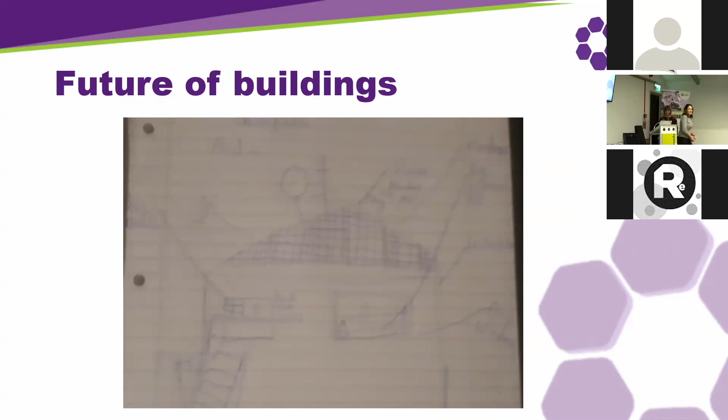So as John said, I'm Joanna Clarke, so I don't need to introduce that. Just a few things I'm going to talk about today: firstly, a little bit about my background, then an introduction to what we mean by active buildings, the political context, why it's important, what we're doing, then the principles, some of our case studies, and what we're doing to try and transform construction.

So I started my career as an architect in a commercial practice. I worked there for 13, 14 years, and during that time I worked on some really exciting, wide-ranging projects, from designing a new horse racing course to a dental practice, and I worked on lots of historic buildings. So really varied jobs that I worked on.

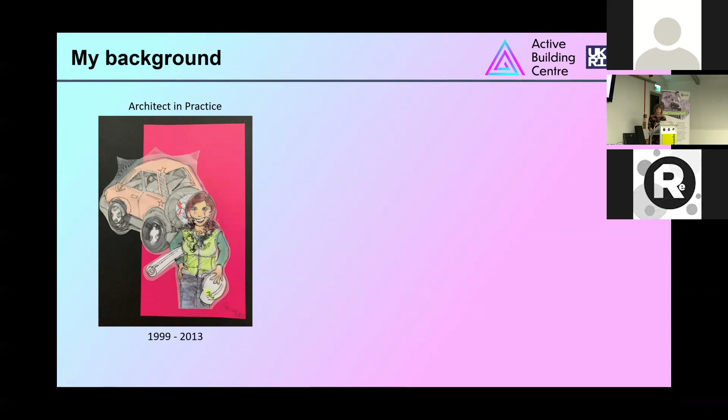But in 2013, I was just looking for a change of direction in my career and stumbled across a role at SPECIFIC, and thought, oh, that sounds interesting, I'll see if I can get a position there. So I started working there in October 2013, and my role at Specific was to liaise with the construction industry and be the conduit between the research and all the exciting new technologies being developed, looking at how those could be translated for use on building projects, and finding suitable buildings to demonstrate them on. As an architect, I thought, well, if we've got all these fantastic technologies, the best way of engaging with architects, contractors and clients is to actually build our own buildings. So we did that, and I'll talk about those a little bit later on.

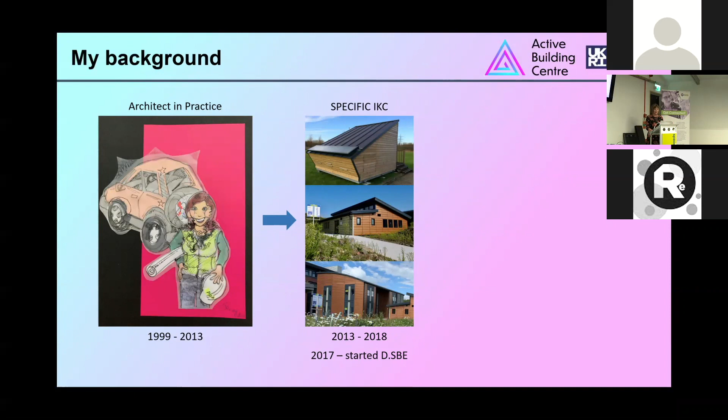Then back in 2017, I started a professional doctorate in the sustainable built environment, mainly to try and create a research project that captured all my architectural knowledge and the knowledge I'd learned on renewable technologies and how to integrate them into buildings, into one sort of research project. That's still ongoing, hopefully finished in the next few years. And then I joined the Active Building Centre back in January 2019, this year.

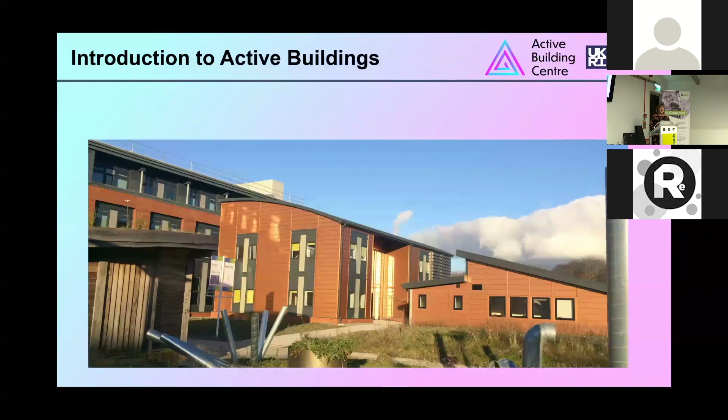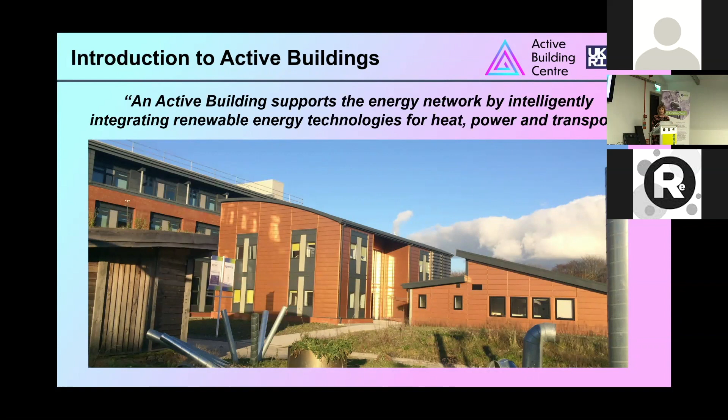But what do we mean by active buildings? An active building is one that uses renewable energy technologies for heat, power and transport, and uses them to intelligently connect the building to the grid. So what we mean by that is that the building supports the energy network rather than being a burden on it, as most buildings are. So we can do things like choose when our power is exported to the grid or taken from the grid. I'll talk a little bit more about that as we go through.

But first of all, I'm just going to set the political context, why it's important that we're doing this work. And on this slide, I'm just going to show some of the targets that the UK and Welsh Government have committed to achieving in the next 30 years. And there's quite a lot of them.

In 2002, the Energy Performance of Buildings Directive set targets to reduce greenhouse gas emissions by 20% below 1990 levels by 2020. The EU 20-20-20 targets added to this with targets for energy efficiency and renewable energy. The UK Renewable Energy Strategy was established to try and reach those targets.

This was followed in 2009 by the Climate Change Strategy for Wales, which took those targets further and suggested we should aim for a 40% reduction below 1990 levels.

Then in 2013, the government launched a report called Construction 2025, which set various ambitious targets for the construction industry to meet by 2025, including 50% lower emissions from the built environment.

Earlier this year, there was a report called UK Housing Fit for the Future, produced by the Committee on Climate Change, which suggested we should have no new gas connections in houses after 2025. This will be implemented through changes to Part L of the building regulations and the Future Homes Standard, both of which are currently out for consultation.

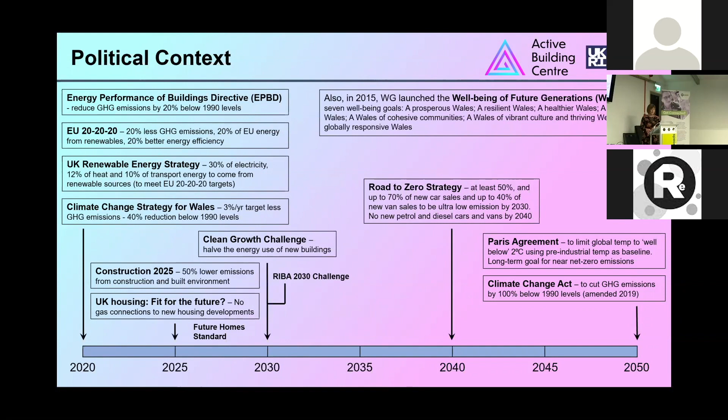As you can see on this diagram, energy is the biggest greenhouse gas emitter in the EU, based on 2017 figures. It's by a long way, so it's a massive challenge for us. And the UK is actually the second biggest greenhouse gas emitter in Europe.

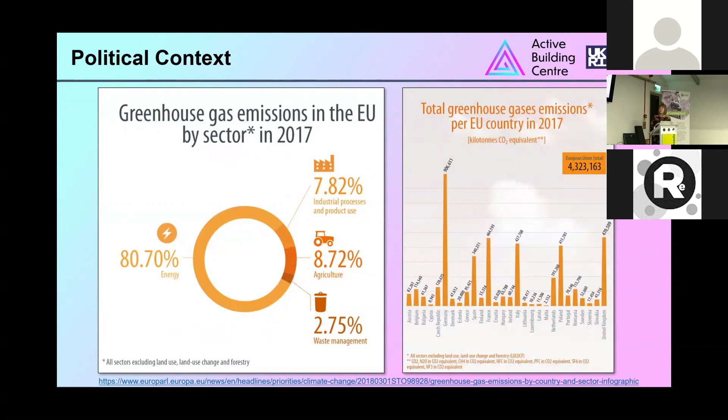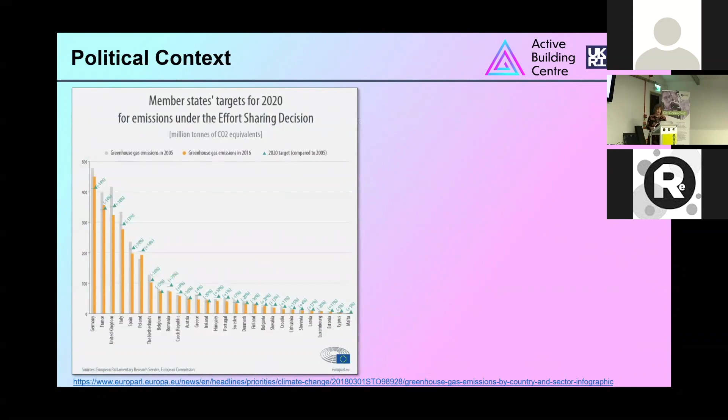The good news is the UK is on, or has actually met, the 2020 target for reducing emissions. But a report produced earlier this year states that we're not on target for our 2030 emissions. So we've still got a long way to go.

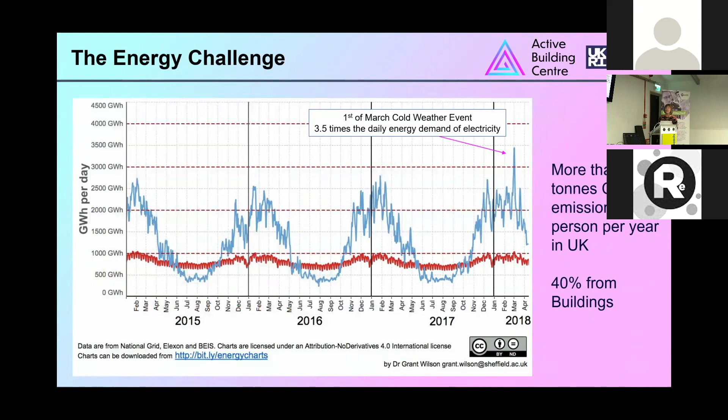We need to do something differently, and that's what we're aiming to do with active buildings. We've got 6 principles to an active building.

The first two are all about reducing energy, so they're not anything new—most people are doing these sorts of things already. They're to do with building fabric, passive design, using energy efficient systems. We talked earlier about passive house principles, and there are building regs stating that we must be more energy efficient. So those are the sorts of things we have to do anyway.

We then look at on-site renewable energy generation. Here we focus on solar energy, but that's not to say other renewable energy sources aren't applicable for other sites—things like ground source, sometimes hydro, sometimes wind, whichever source, it doesn't matter.

And then energy storage for both heat and electricity, which is really critical to provide that buffer between the building and the grid, enabling us to do things like time shift when we use electricity or gas from the grid.

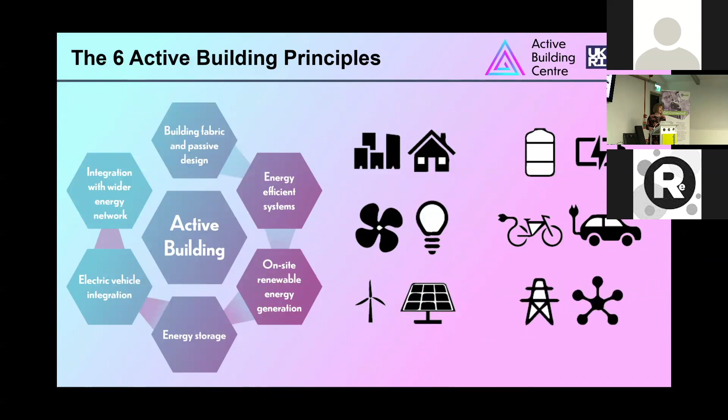And electric vehicle integration. If it were light, I'd show you outside—we've got some electric vehicle charge points. Electric vehicles can be seen as an added storage device for buildings, and the buildings will also support the amount of electricity we need to charge the electric vehicles. Integrating with the wider energy networks is key to the success of these buildings.

So I'll talk you through some case studies. The first active building we built was back in 2014, designed as a small off-grid garden office building. The main purpose was to show researchers specifically, but also to show people what we meant when we talked about what we then called buildings as power stations—you could see all these technologies working together on one small building. It has a built-in integrated PV roof, a glazed solar air collector, and heating inside the building, and it's completely self-sufficient. This was quite successful in getting that idea across to people.

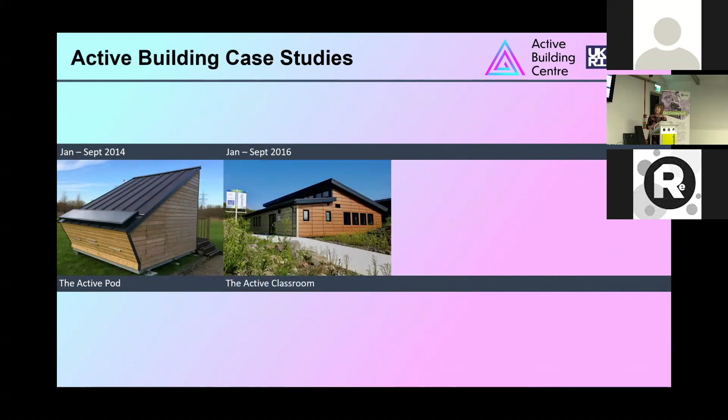Then in 2016 we built this building you're in today, the active classroom—I'll talk about that in more detail in a minute. In 2018, we built the building next to this one, called the active office. We're also involved with a housing project in Neath, being developed by a social housing association called Pobl.

What you'll notice is the timescale on that project: December 2015 to November 2019. That's how long it has taken to actually come to fruition—it's almost nearing completion now. This highlights why we need these demonstrators, because they enable us to learn quickly about what works and what doesn't. We're in control of the timescales. On projects we work on with partners, we're not in control of timescales—you've got challenges like planning or funding issues, and it takes a lot longer to get the technologies out there. So on these demonstrators, we've been able to see quickly how well they work together.

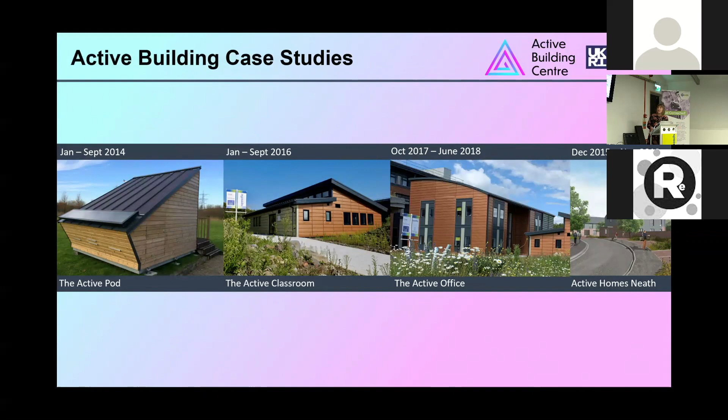Talking in more detail about the classroom: when we built this, our purpose was not only to showcase the concept of active buildings to the public, but also to demonstrate lots of new technologies. One important point about Specific is that it's an industrial and academic collaboration, and one of its main purposes is to help UK companies grow. So it was really important for us to showcase new products that hadn't been used in construction before. As you can imagine, it's very difficult for contractors, architects, or even clients to take a risk on new products for a building people will use every day—but we were able to take that risk.

The roof you see, the second picture along on the bottom, is by a company called BIPVCo. That was the first time that particular PV had ever been installed on a building, so we were able to try it here. It's worked perfectly well since we installed it, and we went on to install it on our second building, the active office, and it's also used on the Active Homes Neath project. When we put it on this building, it didn't have any warranties or accreditation—it now has all of those, which helped the company prove that it actually worked. They now offer a joint warranty with Tata of 25 years.

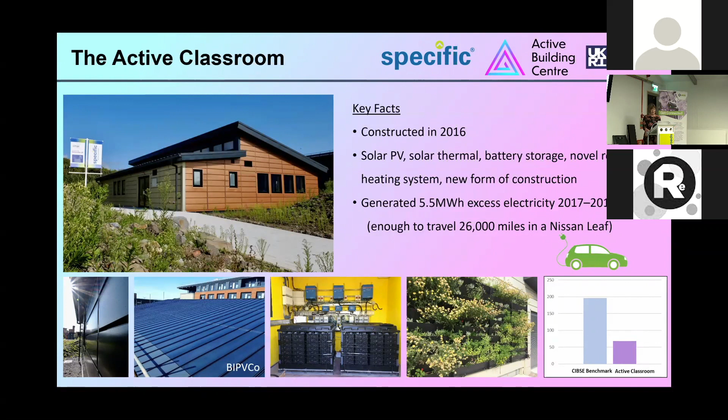We generated 5.5 megawatt hours of excess electricity in 2017 to 18, which was enough to travel 26,000 miles in a Nissan Leaf. So that was nice - we're able to say our cars are powered by the sun.

So this one had been quite successful in getting us noticed in the construction industry. It got people's interest - people were saying, can we have one of those buildings? But there were so many new products in this building that we couldn't really replicate it. So Innovate UK, who are one of our main funders, gave us some money to build a second building, and for this they said it must be repeatable, it should use commercially available, albeit innovative technologies, and it's something that can be taken to market.

So we worked on this one with a local modular build company called Wernick, working with them right from the start of the design, which is really critical because we could design the building to their module sizes. We also had another very challenging timescale on this building - we were awarded the money at the end of October 2017, and they said the money has to be spent by March 2018.

And at that point, we hadn't even started thinking about a building, let alone designing. So between the end of October and Christmas, we managed to design the building, get planning permission, get a main contractor on board so that they could start on site in January.

It does highlight the benefits of using off-site construction because our construction site was just a muddy, wet mess in January, but meanwhile the office was being manufactured in a factory. So within the first month, we had a weather-tight building on site. It was then clad and fitted out over the next few months, and we actually finished it in June 2018.

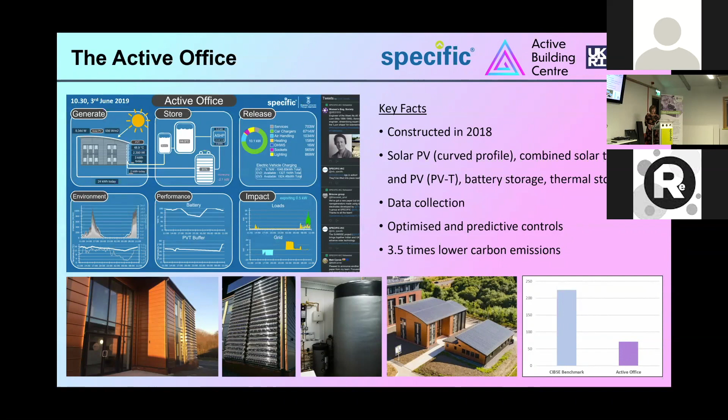When does your car next need power? Maybe it's not till the following morning, so it will charge overnight rather than when you've just plugged it in when there's a heavier demand on the grid. So all sorts of things like that. And we can display the data in different ways. So this shows the cutaways through the plant room. The large rectangle you see is the thermal store, which we try and keep around 40 degrees.

That can be charged in different ways. So ideally we'll be charging it from the solar thermal tubes. That will only happen if they can get a high enough temperature. So on a cloudy, wet day, you're not going to be charging from the tubes. So then we've got a dual stage air source heat pump which kicks in, and that can be used to charge up the tank. But as I said, that doesn't have to be during the day. That could be done overnight.

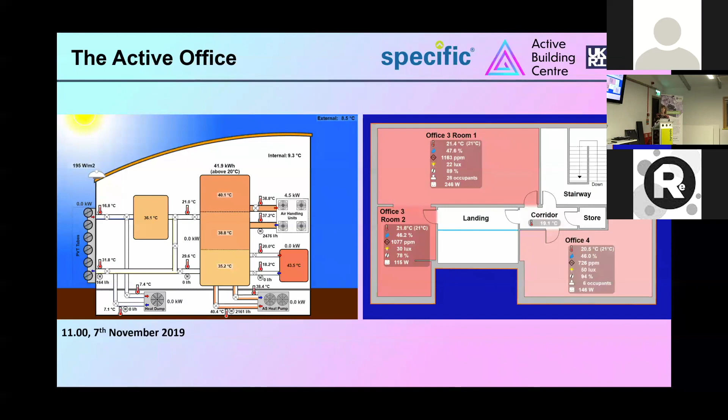And then we can see floor plans of the space to see what temperatures we've got. We're trying to maintain a temperature of 21 degrees in all the spaces, and you can see on this diagram we are actually managing that through the controls.

This is the housing project that I talked about. So this is called Active Homes Neath. It's 16 dwellings, 8 flats and 8 houses, a mixture of 2 and 3 bed. And they started construction last June. It was due to finish this August, but they've had a few delays and it's nearing completion now. So it should be finished the end of this month.

And this, I think, is going to be really interesting because we're going to have social housing tenants living in these buildings, maybe people who don't normally think about where their energy comes from. It'll be quite interesting to see if they use their energy differently, how much interest they actually take in it. So we've got a government study with BEIS, which will be running for a year of occupancy. They'll be monitoring in the houses so we can actually see the real data, but also they'll be interviewing the tenants to see how they like the houses.

I visited the site yesterday, and they're really nice houses to be in, and you wouldn't really know that they were anything different other than the fact that, because they've got the transpired solar collectors on the walls, their heating is air heating rather than radiators, rather than a wet system. So that's the only real difference I think they would notice. They're lovely and warm, built to a high standard of thermal efficiency, and they've got the PV on the roof, which you can just about see there, and they've all got individual batteries as well. So I think this is going to be an interesting project over the next year to see how it performs.

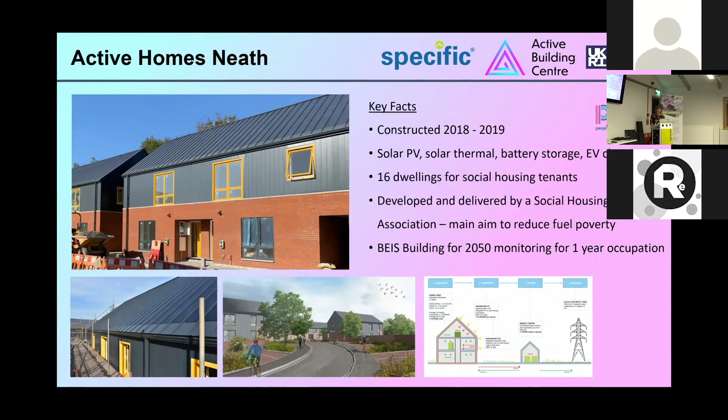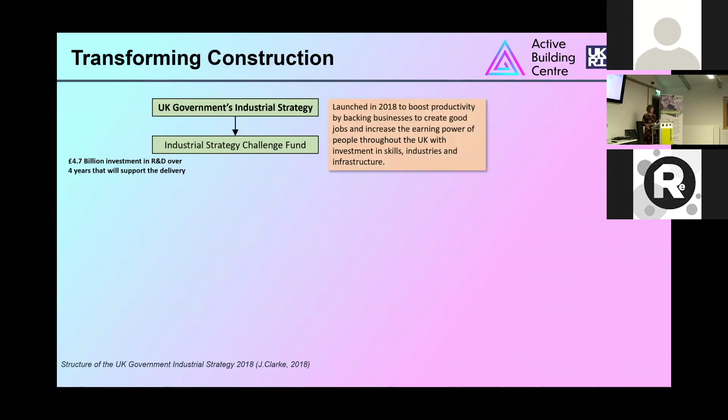So there was a large investment in skills, industries and infrastructure and they set up an Industrial Strategy Challenge Fund of £4.7 billion, which was investment in R&D to be spent over the next 4 years to support the delivery of the programme. And under that, they identified 4 grand challenges. There was artificial intelligence and data, an ageing society, clean growth, and the future of mobility. We're funded under Transforming Construction, which is part of the Clean Growth Strategy, alongside something called Prospering from the Energy Revolution. And this funding is split in 3 ways.

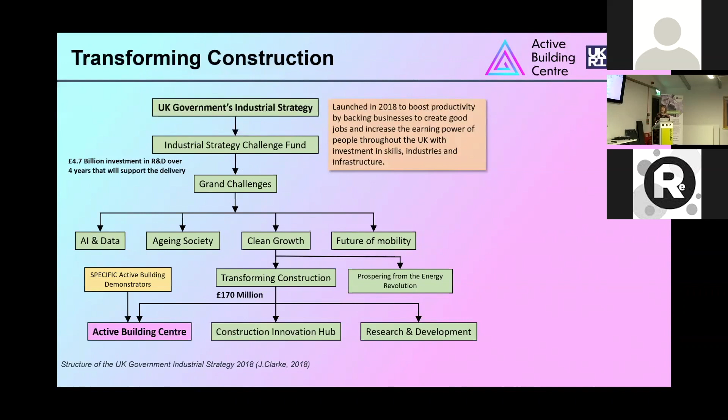The Active Building Centre, we had £36 million of funding to spend over the next 3 years. Construction Innovation Hub, which is a combination of the Building Research Establishment, the BRE, the Manufacturing Technology Centre in Coventry, and the Centre for Digitally Built Britain. So that's very much focused on digitising construction, on off-site construction, modern methods of construction, all of that sort of thing. And then there's other research and development projects.

So they just closed their second call for funding for people to bid in. So people could bid in and say, I'm building this factory, I want to make it an active building, and they could bid for money to do that. And then they will work with us to support those projects. So the funding is just closed, but the assessment hasn't finished yet of those projects.

But the Active Building Centre was really set out from these demonstrator buildings and the work that Specific is doing. I think Specific was going maybe a bit further than it wanted to into the construction world. So it got to the stage where we really needed a new entity to take it forward.

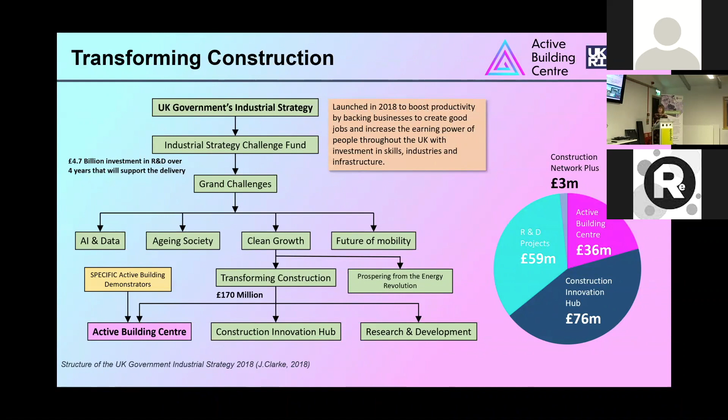So the vision for the Active Building Centre is to transform both the UK construction and energy market. So I think that's the key point about what we're doing, is it does actually affect both industries. And that is really challenging because not only is the construction industry extremely resistant to change, so is the energy industry. So trying to do them both at the same time isn't easy, but I think it's necessary if we're going to do anything about the targets that I showed you earlier.

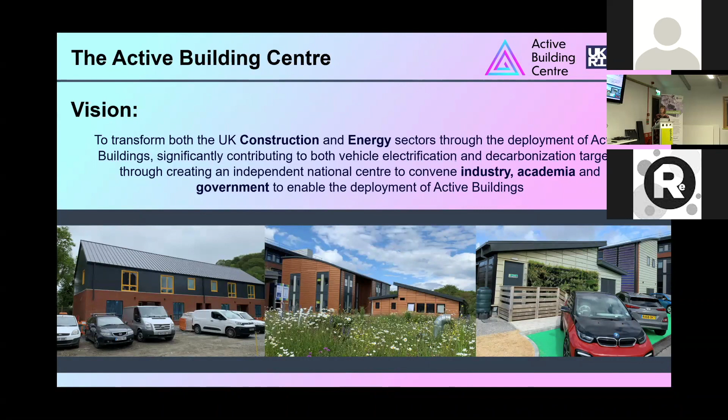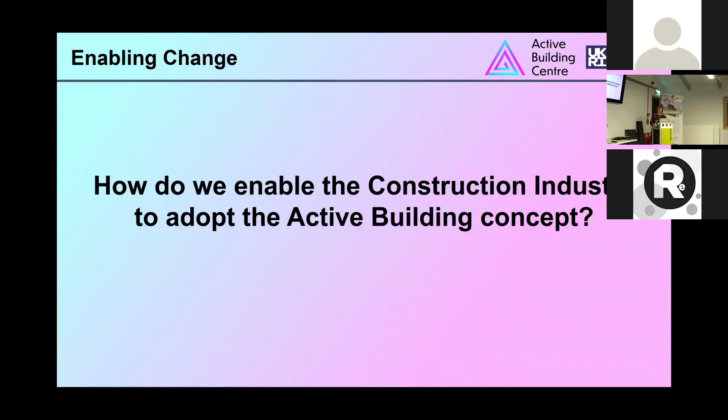So what are we doing to actually enable the construction industry? Because that's what we've said we'll do. We'll enable the construction industry to adopt the active building concept. And how do you do that? So one of the ways is you get the word out there, you spread knowledge about what we're doing. So you can do that through contributing to magazine articles, journal articles, and things like the Royal Institute of British Architects journal, which is well read within the profession.

Speaking at events, so the picture on that side is our head of engagement talking at UK Construction Week in Birmingham back in October, and there I am speaking at Grand Designs Live, and also entering for awards, because that gives us credibility within the industry as well as getting us noticed. And when we attend those awards, we find then people come to us and say, "Oh, can you help us on this building? We'd like to use the concept on our buildings." So it's a really great way of actually getting us noticed.

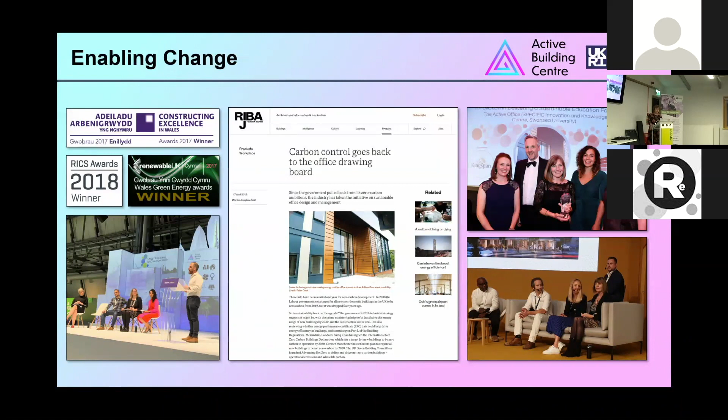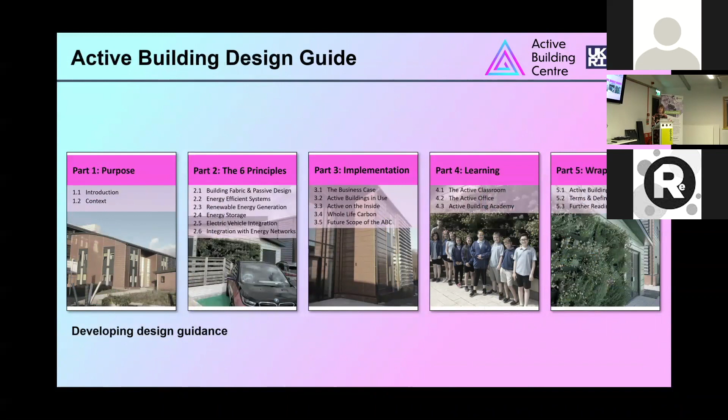And then one of the things I'm doing through my doctorate, but it's actually also going to be one of the first publications from the Active Building Centre, is developing a design guide so that we can give this to architects. This is how you would design an active building. So the main section is really part 2, which is structured around the 6 principles of an active building. But we're also going to talk in there about whole life carbon, the business case for active buildings, life cycle assessments, all of that sort of thing. And also it's somewhere where we can put case studies of buildings that we've actually done as well.

So I'll just talk through some of the key principles in a little bit more detail. So the first one is building fabric and passive design. And the sorts of considerations we mean here are things like orientation of the building, utilising biodiversity in your project, the layout, the form factors. So a rectangular space is going to be easier to make energy efficient than something that's maybe star-shaped. It's looking at those sorts of things.

Use of passive natural ventilation and natural daylight as much as possible, passive cooling techniques, water, so several aspects to water, not only saving water, but actually, really importantly, especially at the moment, reducing flood risk. We've all seen the flooding that's going on at the moment, and a lot of that is down to a lot of the hard surfaces that we've got in the built environment. So it's more about greening up the built environment.

Wales has actually introduced into their building regs, I think it was last year, that it's essential that all new building projects have sustainable urban drainage systems, or SUDS they're called. So that means that if you were paving an area, it would be permeable paving. You try and reduce the amount of hard surfaces that are impermeable. And also I think biodiversity comes into that as well, actually planting up spaces. So there are some moves at the moment towards, if you're building on a site, leaving it greener, or at least as green as you found it when you started. So you can do that through things like green roofs and living walls, and actually just landscaping around the building.

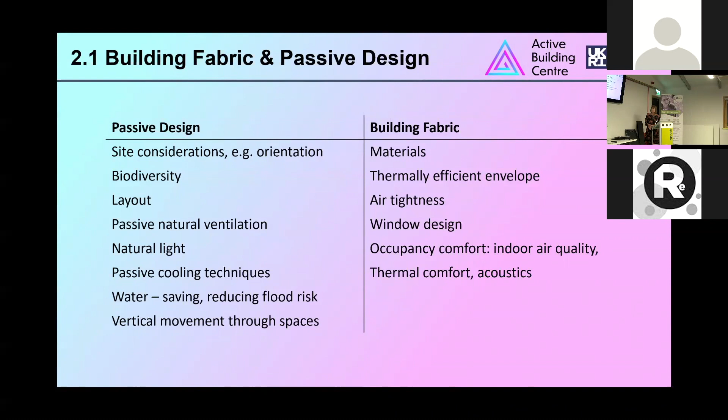So I'm just going to show you some of the things that will be included in the design guide. So there'll be diagrams to help people. They might be quite simple to people, but they might actually just act as reminders for people to think about some of these things in projects.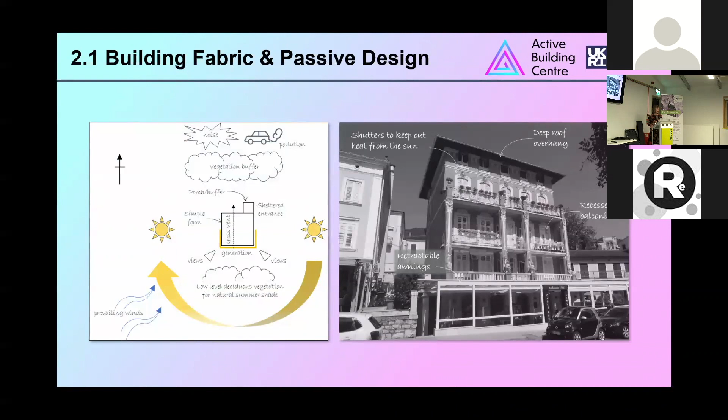One of my biggest bugbears is things like this, which is fully glazed facades. And if you walk around London, my new hobby seems to be taking pictures of these facades everywhere. You see these fully glazed facades with all the blinds down on a sunny day, which means all the lights are on inside. And you don't need that much glass in an office. You need enough for natural light.

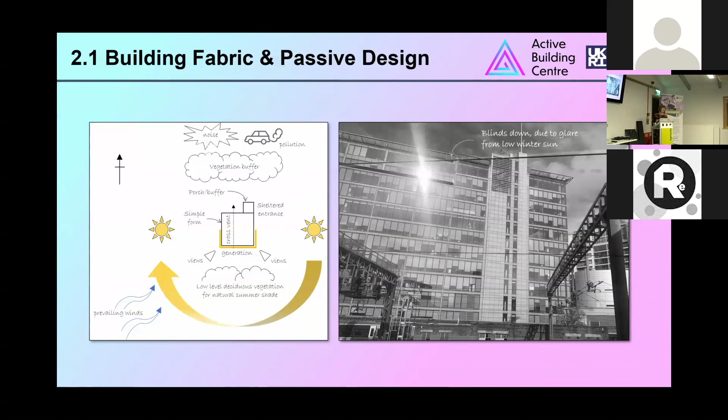But actually, all you end up seeing is the mess that people have under their desks, which you can see in this photo when you zoom in. And this, the blinds all down at different heights. And I don't think that's probably how the architect envisaged the building to be when they designed it, but it's just not thinking about these things.

This one says energy efficient systems. So with the move to decarbonising the heat network, we're going to be looking at low carbon heat networks, so district heating, use of electric heating, either direct heating or things like heat pumps, and they can be either air source, ground source, even water source heat pumps.

Use of mechanical ventilation, but only when you need it. Are there better ways to cool than just pumping air conditioning into spaces? Use of energy efficient lighting. And actually, what's really important is making sure that these different systems work together rather than against each other, which often happens in buildings.

So interestingly, both parts of the building regs that are being revised at the moment are Part L, which is energy efficiency, and Part F, which is ventilation. And they're the two, I would say, that often do conflict when you're designing buildings. So it's quite nice to actually see them being thought about together.

This is just a diagram of the systems working together at the Active Office. So it shows really that you're using the best of all the technologies. So you're using the PVT tubes, they're generating electricity to go into the batteries, but also heat to go into the thermal store. The batteries can power the air source heat pump or the immersion heater to provide the hot water. So it's just thinking about how all these systems work together.

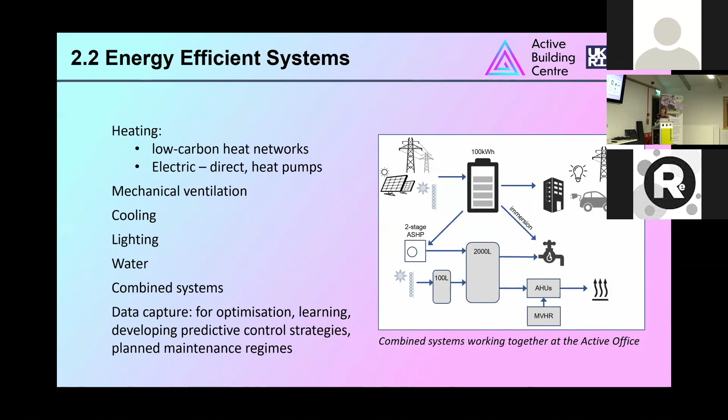And then renewable energy generation. So this slide is looking at electrical. So I'll have things like the different sorts of design considerations that you need to think about if you're using solar energy. So things like orientation, shading, making sure your facades that you think are going to be generating electricity are not shaded, what sort of available surface area you have.

On a building of this size, which is single storey, we've got a large roof area, we can then perhaps generate more energy than we need, but the higher you go in buildings, the more difficult that is on a roof only. So if you can use facades as well, or different technologies, then that's a benefit.

Whether you have any planning constraints, so the roof that we showed here, for example, that's very low profile. We've had people come to us as well, they may be just developing changing rooms at the bottom of sports pitches, and they say, well, we can't put PV on them because of the fear of vandalism, but they're quite interested then in putting something like this on because there wouldn't be any opportunity to vandalise. So all these different things you can think about when selecting technologies.

So that's just another image of our PV roof and the PV window that we've got in this building. So NSG, which is Nippon Sheet Glass or Pilkington glass, they've developed a prototype PV window which we retrofitted into this building, and we're testing that for them.

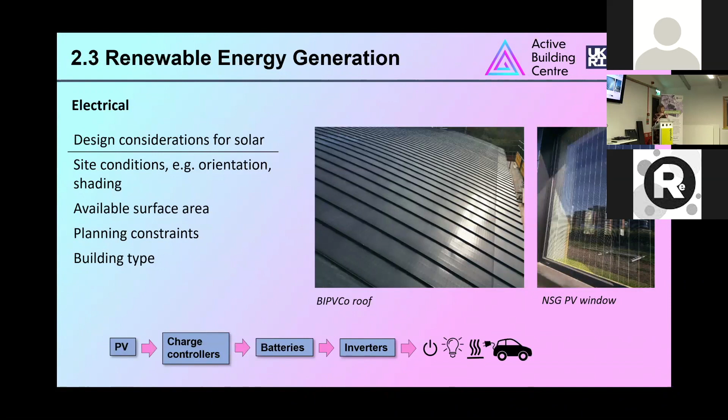And then this, just looking at different types of solar thermal collectors. So there are a number of different types. We're actually testing some of these on a test rig that we've got on an industrial building in Margam, where we've got a test rig, so we're going to be able to properly evaluate these different systems and see how effective they are when working alongside each other. That's just a close-up picture of the transpired solar collector and the combined solar thermal and PV system.

And again, looking at what you need when you're using these. So ideally, if you're using solar thermal, you will use a thermal store as well, because then you get the most out of your system.

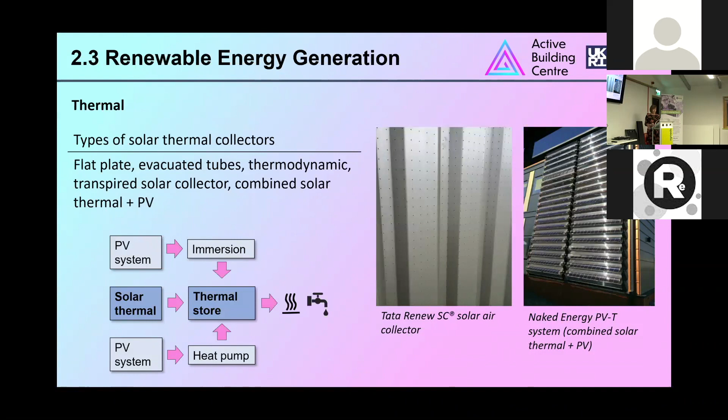And then different types of electrical storage. So we've got the salt water, or aqueous hybrid ion, that we have in this building. Lithium ion is the type that you'll see most used in buildings at the moment. The one you're seeing here is a home energy storage, so Tesla, or this one's Sonnen Energy, they do quite nice looking batteries that you wouldn't mind having in your house. And then the flow batteries, which we're going to be installing in this building, hopefully later this year. Is that right, Tom? Yeah, January.

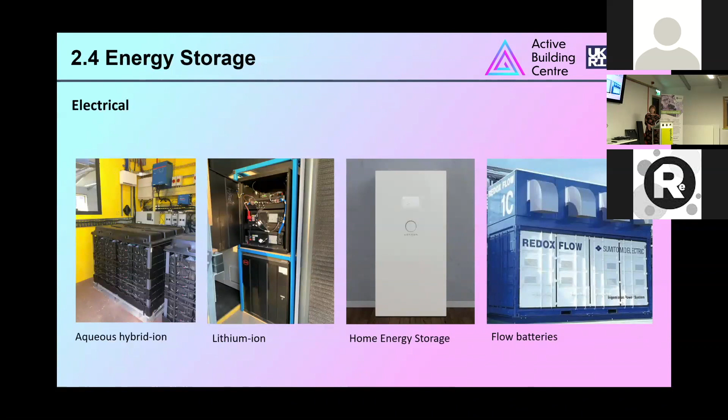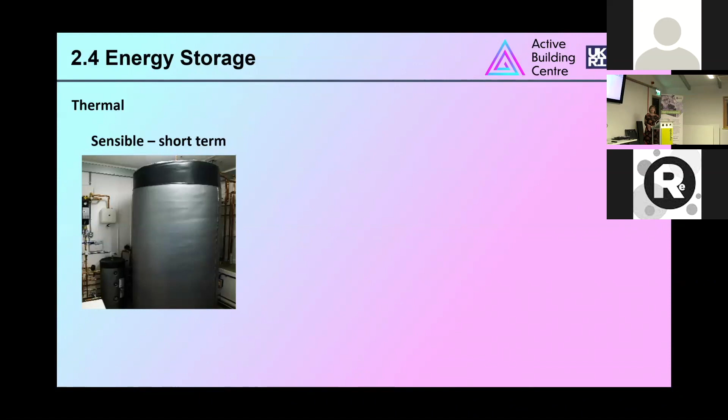And then thermal storage. So there are different types of thermal storage. Sensible, which is normally water - this is a picture of our 2,000 litre water tank that we've got in the office. It's a very well insulated tank, but water tends to, as you all know, lose energy over time. So that's short-term storage.

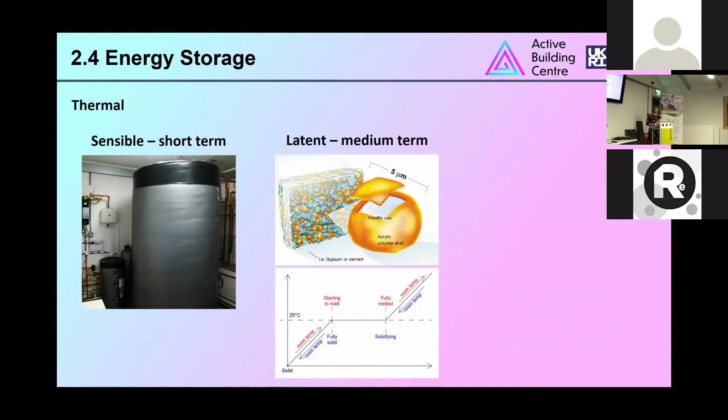Medium is something like a phase change material, which we call latent storage. Phase change materials in buildings can be embedded into ceiling tiles or the walls of buildings to almost mimic thermal mass for a building. So you can imagine they're absorbing the heat. If we had phase change materials in this room, they would absorb all the heat so that they try and regulate the temperature in the room, maintaining that comfortable temperature so it doesn't get too hot in here. And then when we all leave, we can open some vents and discharge that energy so that it's ready to be charged up the following day. So there are some companies, I think Armstrong ceilings had them, that embed this into their ceiling tiles.

And then you've got something called thermochemical storage, which is for longer term. There's a group at Specific who are working on this technology, which I think is really exciting and quite game-changing for the industry. This is a matrix of basically a vermiculite, which you can see in the picture, with salts added to it, which is a lot denser than water, and it doesn't change phase and it doesn't lose heat. It's an endothermic reaction that absorbs the heat into the salt solution. So when you are generating heat in the summer months from one of your solar collectors, you can transfer that into this material. It will store that heat indefinitely until you pass cool, damp air over it.

So you can store heat now from summer to winter. You could also use it to capture waste heat from industrial processes and then maybe use that where it is needed, perhaps in housing or other areas. So I think that's a really exciting technology, which we're hoping to have a prototype installed in this building probably early next year.

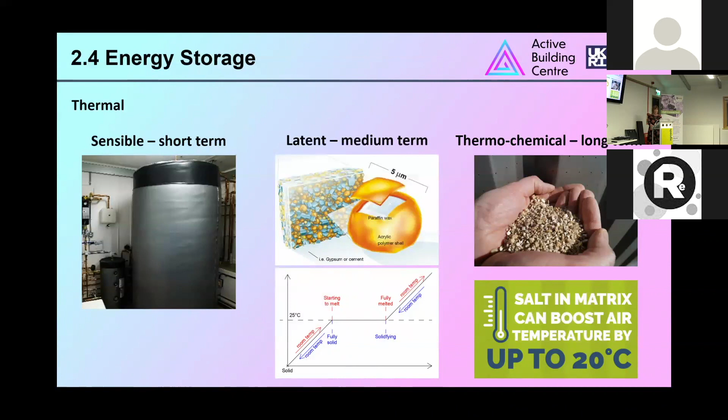And then electric vehicle integration. This is a statement from the Road to Zero, which says our mission is to put the UK at the forefront of design and manufacturing of zero-emission vehicles, and for all new cars and vans to be zero emissions by 2040, which is challenging in itself, but then that opens up new opportunities for buildings.

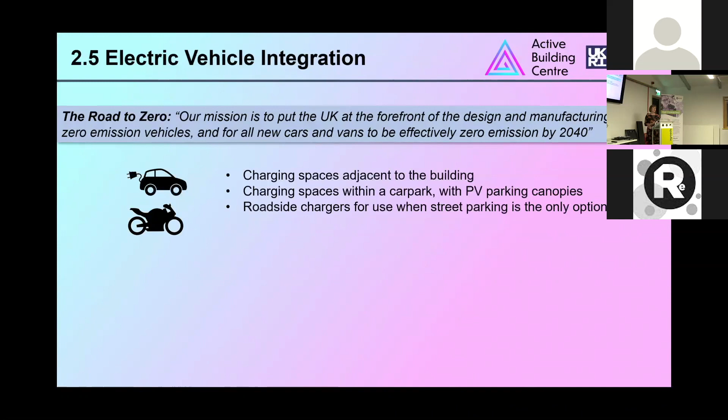So you've got different types of electric vehicles and different types of charging that's needed. For electric cars and motorbikes, you can either have charging spaces adjacent to the building in a car park environment. You could also have PV parking canopies over them, which not only would protect the cars, but also you could use that power to charge them. And there are roadside chargers for use when street parking is the only option. I've seen a lot of them in places like London.

Also, you've got e-bikes, so we've got a few e-bikes here. We're looking at developing a bespoke e-bike charging shed, which would have PV on the roof, and it would hopefully generate enough power to charge up your battery in the bike when you're at work, and maybe charge up your light so you can go home safely.

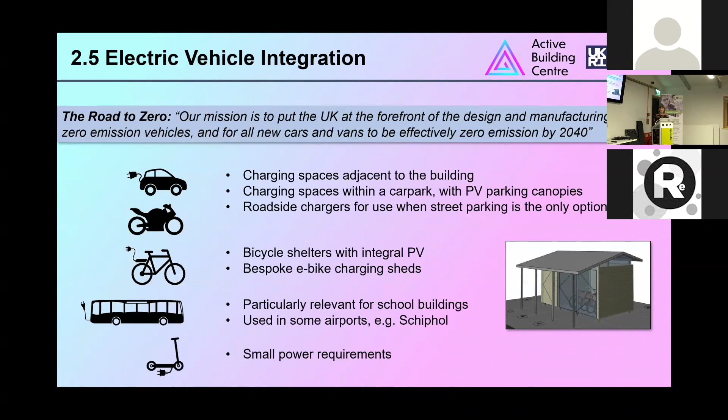That's something we're looking to build in our facility in Baglan, hopefully soon as well. And then you've got e-buses. Schools are becoming more interested in using e-buses because they do relatively short distances. Some airports use them too, Schiphol use them, and actually the batteries they use in the buses are the same batteries that we've got in the active office. And then you've got things like electric scooters, which do have their place and perhaps only need smaller power requirements.

For us, the university has an embedded network, so if we export to our neighbouring buildings between 5 and 7:30, we're saving the university 15 pence per kilowatt hour. Or we can export to electric vehicles, and then we're displacing the cost of fuel, which is around 35 pence per kilowatt hour. So what we're able to do with these buildings is choose when we export in relation to these things.

We can also choose, and this is something we're looking at now, whether to export depending on the carbon intensity of the grid at any one time. Sometimes the electricity grid, as you may have seen in headlines this year, gets most of its electricity from renewables on some days. So then maybe you don't want to export, but other times when we'd be using coal or gas, then we do want to export. So we can choose based on that.

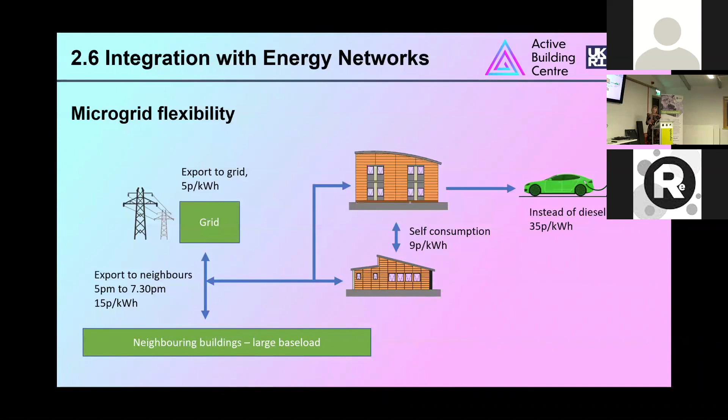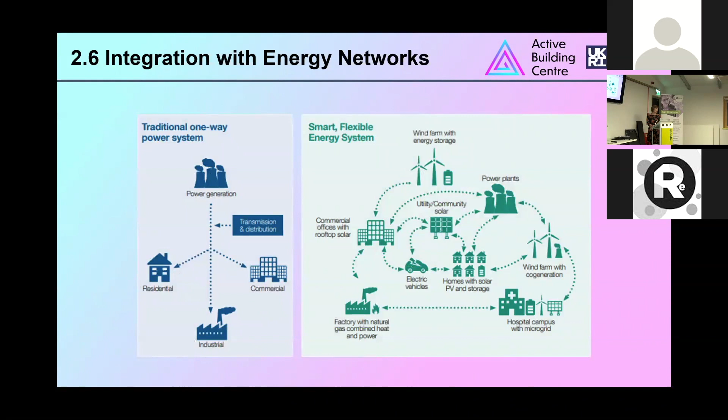The predictive controls we talked about can link up to those sorts of systems. So that's to say we're moving from a traditional one-way system, where energy all comes from central power generation, to a more flexible system, which I think is needed if we're able to meet the targets we've set out to.

There's a lot of work we've got to do over the next 3 years to enable change. We're developing things like performance specifications, ways to model these buildings, new sorts of tools, and more active building demonstrators. We've committed to develop with partners 20 demonstrator buildings by February 2022, when our current funding comes to an end. Those are all new builds at the moment, and we're looking at different building types, working with people on potential school projects, residential, industrial, and commercial buildings.

My only fear with them is the timescales are not always in our control, as I mentioned earlier. That's quite tricky, because we want to get into these projects as early as possible in the design stage so we can influence things like site orientation and the actual form of buildings. Whereas if we want buildings completed in this timeframe, we may need to work with more advanced buildings instead. So there are some challenges around that.

I haven't really mentioned retrofit, but that's one of the other major challenges we have coming up, and I think it's going to become a lot higher on the agenda quite soon.

We're also developing a database of all the active building data we're collecting. We collect a lot of data from these two buildings, so with any partners we work with on projects going forward, one key thing is that we need to capture data so we can get evidence to help with building performance evaluation. That can then help with things like optimizing the systems, fault finding, and developing predictive control strategies. So it's really important to capture that data, but also to actually do something with it.

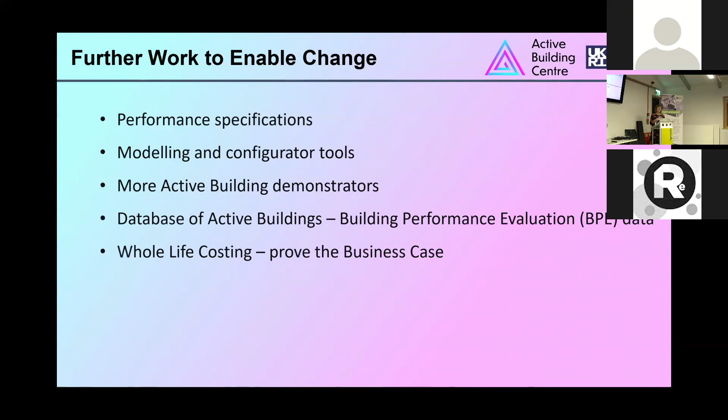So that's another different way of thinking that needs to happen, because it's not how things happen at the moment in buildings. And then the life cycle assessments to assess the carbon, not just the operational carbon, which we're able to prove at the moment, but also the embodied carbon, which is a lot more difficult to prove in buildings.

And crucially, I think, is the education, skills and training at all levels. We have so many issues in the construction industry at the moment. We don't attract enough people into construction or engineering in the first place. And then when we do, there's not sort of keeping training, so people don't necessarily keep up to date with all the latest things. And there's also a lot of inertia in construction. People don't, once they've got a way of working, they don't actually want to change. So I think that's another massive challenge for us.

So one of the things we're looking at is working with partner projects on how we can develop training courses for installers. I think one of the biggest issues we have in buildings, which we're experiencing in our own buildings, is the installation and commissioning of systems. It's often not right - it never actually gets to be right when struggling with our own buildings. And I think part of that is because people don't really understand the bigger picture, how important it is to install correctly and to commission properly. So I think there's a lot more to do around that.

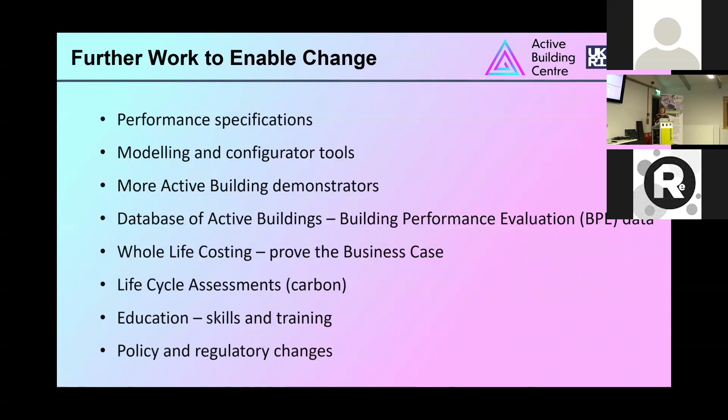And then the policy and regulatory changes, which is more long-term, I would say, because that's quite difficult to change as well. But at the Active Building Centre, we've actually got some people who are pretty much always in London, speaking to the right people who are writing policies and new regulations and trying to influence them.

And that's me done, really. That's all I've got to say. So it's just, whether anybody's got any questions or wants me to elaborate on anything further. Not sure how I'm doing time-wise.

Thank you. And my voice got out. Well done. If I can start, so because we've got the online link as well, we've had a few questions from online, which I will just go through, if that's all right, Jo. Yeah, so let me get back to...

One question from Matt Brooks. He sent a couple, I'm going to paraphrase some of them. So what are your immediate objectives and priorities for 2020? That's a good one. I think the objective for 2020 is really to get more projects going with partners. So we've got a long list of leads and opportunities for projects, but now we need to turn them into real projects. So I think that's one of the main priorities.

And also trying to get some information out to people. So the design guide I talked about, it's not ready to be issued to people just yet, but elements of it are, and putting together some information that we can give to people, share with people, I think is probably one of the other priorities. And also working on a bit of a skills roadmap.